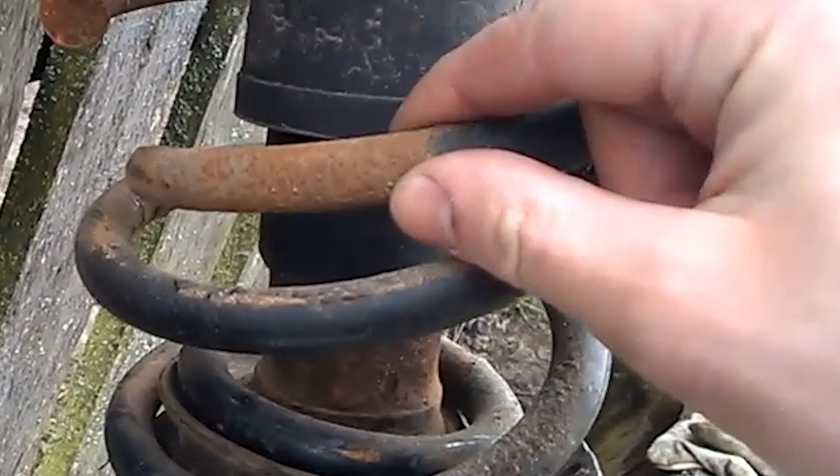Hey there! In this video, I'll tell you how to replace the front springs using my Audi A6 C5 as an example. I had a mishap where the front spring of the shock absorber strut in my car snapped. As you can see, the car's clearance has decreased, and if you look under the wheel arch, you can see that the spring is broken.

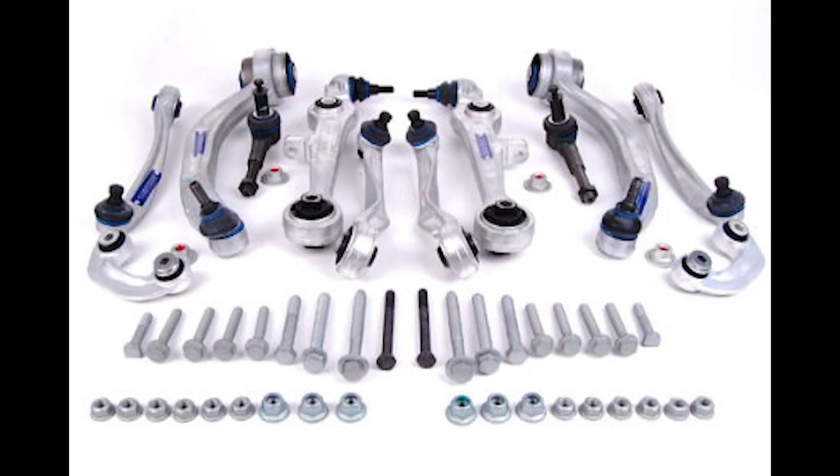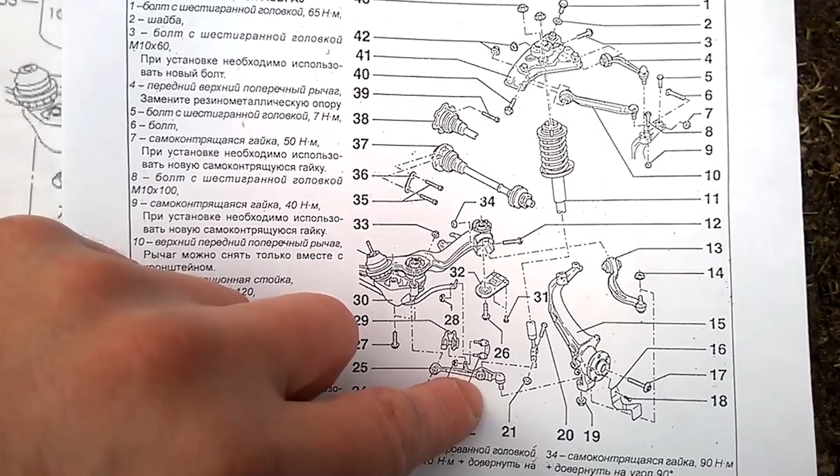By the way, in these cars, the front suspension is multi-link. According to the diagram, it's evident that we'll need to unscrew two upper control arms, remove the top bolt, unscrew the bracket under the hood, and from below, unscrew the bolt attaching the shock absorber to the lower control arm. Then, we can remove the strut to replace the spring. And now, let's do it.

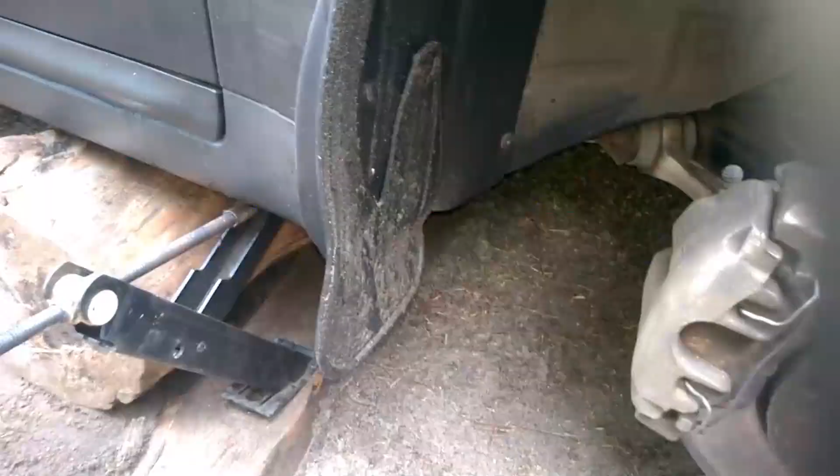We'll be changing the front springs on both the left and right sides. To do this, we remove the wheel, place the car on a secure jack stand, and start disassembling the suspension. So, after removing the wheel and jacking up the car, we can inspect the spring. As you can see, it's broken and its condition is terrible. Next, we need to remove the entire strut.

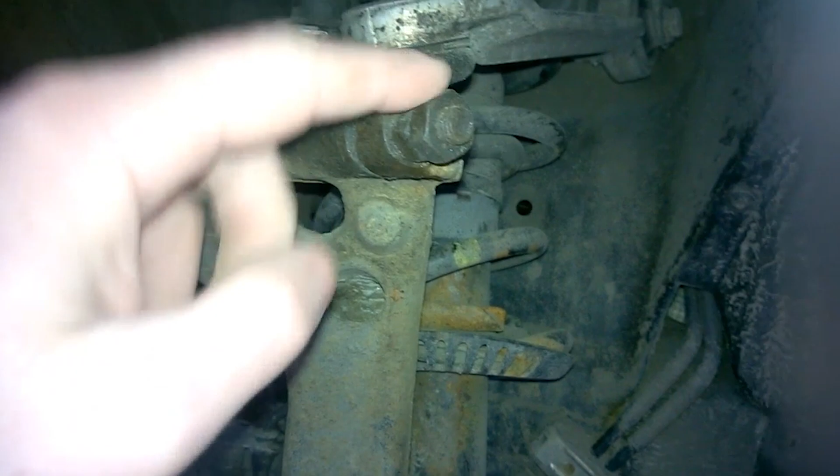To do this, we unscrew the bolt in the steering knuckle, which attaches the two upper control arms. Simply take it out and remove the arms. Then, unscrew one bolt here, attaching the shock absorber to the lower control arm. After that, under the hood, we'll need to unscrew 3 bolts to detach the upper bracket from the body, and then we can remove the entire strut.

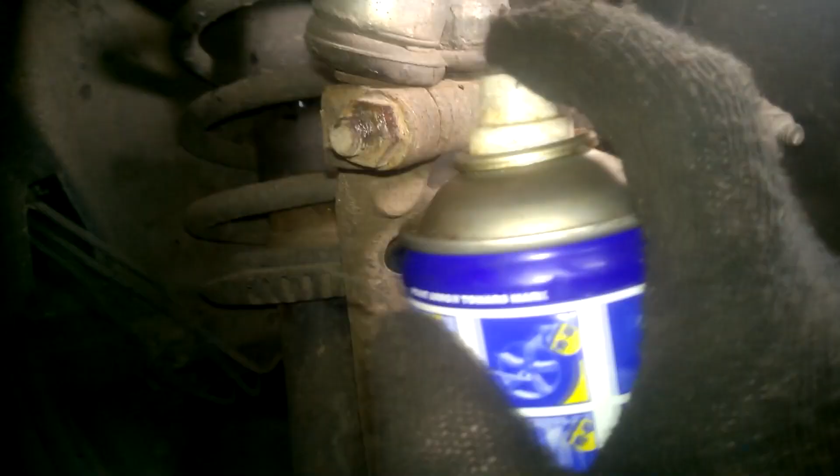The biggest problem is the long bolt, which tends to get stuck, and you won't be able to remove it without drilling. So, for loosening the steering knuckle bolt, my advice is to clean these slots where the control arms go. I've cleaned them, and I've generously applied WD-40 here. This is to ensure that the solution reaches the bolt and dissolves the rust. After cleaning everything, I started turning the bolt and continued applying a special solution. Then, with strong blows, we dislodge it.

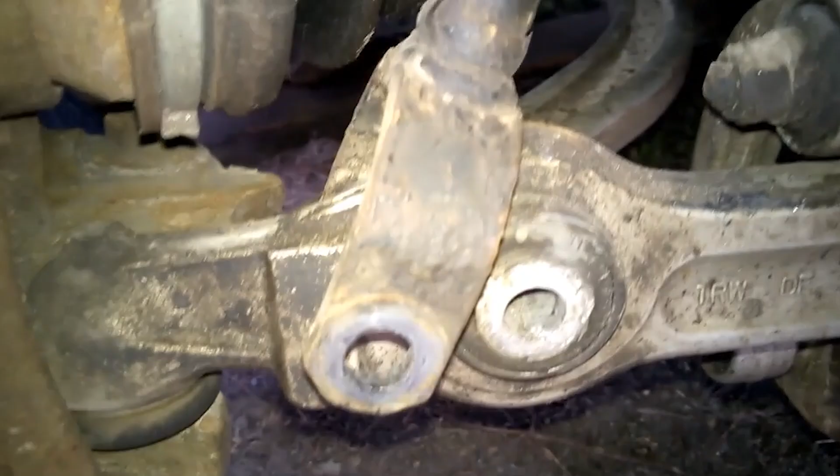Afterward, unscrew the lower shock absorber bolt. To be honest, it took a while to unscrew the lower shock absorber bolt because it gets clamped. So, it wouldn't hurt to loosen the stabilizer bar or somehow press down the lower control arm. While working from below, we rotated the strut and moved it closer to the CV joint to make it easier to reach the shock absorber with the spring. Just be careful not to damage the CV joint boot.

We've removed the long bolt from the top, and now we need to take out 2 levers. Suspension levers can rust and become difficult to remove, so to avoid hitting them directly, there are holes here through which you can use extensions to knock out the levers. I used a wrench from the toolkit. I tapped gently from below with a hammer, and everything comes out easily.

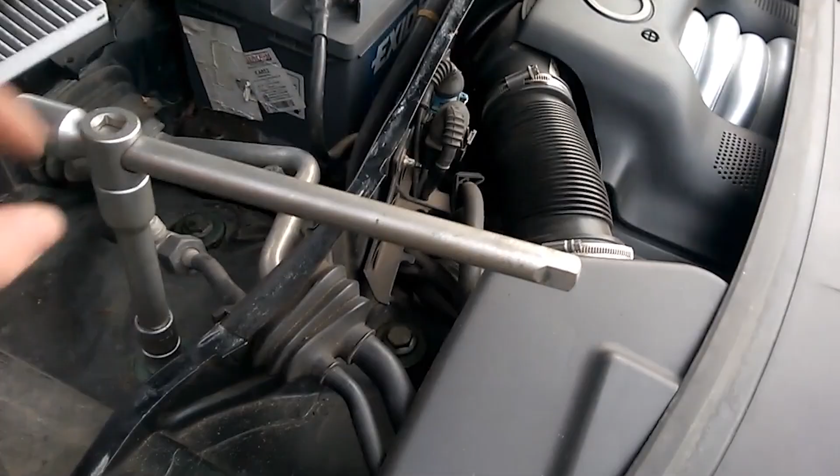After removing the upper levers, open the hood, where you need to remove the plastic shield and locate 3 bolts securing the bracket. Here's 1 bolt, here's the second, and here's the third. From the top under the hood, we've unscrewed the bolts of the strut. The suspension levers are disconnected, and everything is detached from below as well. Now, carefully take and pull the shock absorber strut outward, and then we'll proceed to disassemble it. So, we've removed the strut.

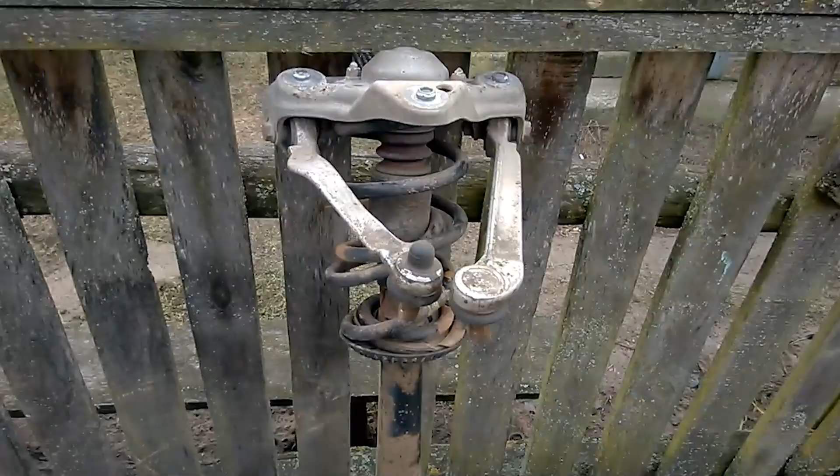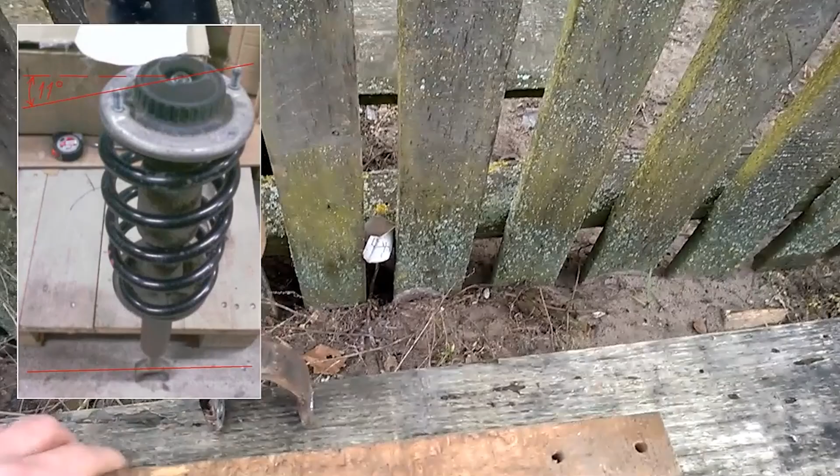Now, look at the condition of the spring. I didn't know how long I had been driving like this until I discovered the issue. I want to draw attention to the 11-degree angle. That's how the upper bracket is installed. If you look at the parallel strut, the upper bracket should be slightly offset at an 11-degree angle. In simpler terms, when disassembling the shock absorber according to the instructions, all these details are described.

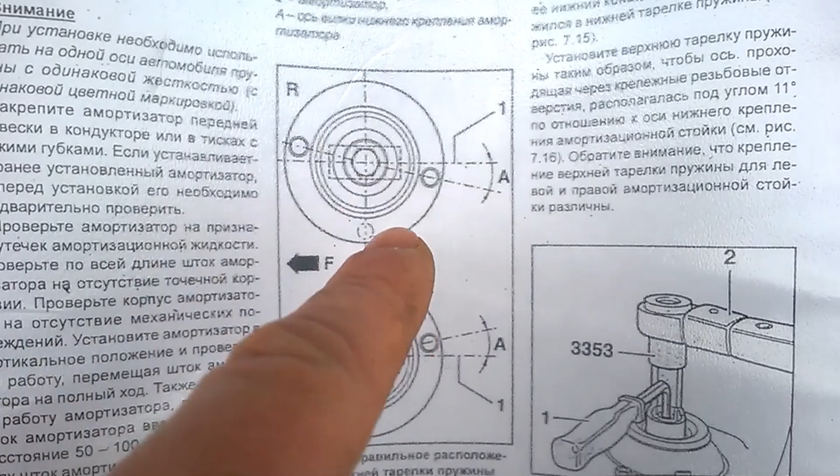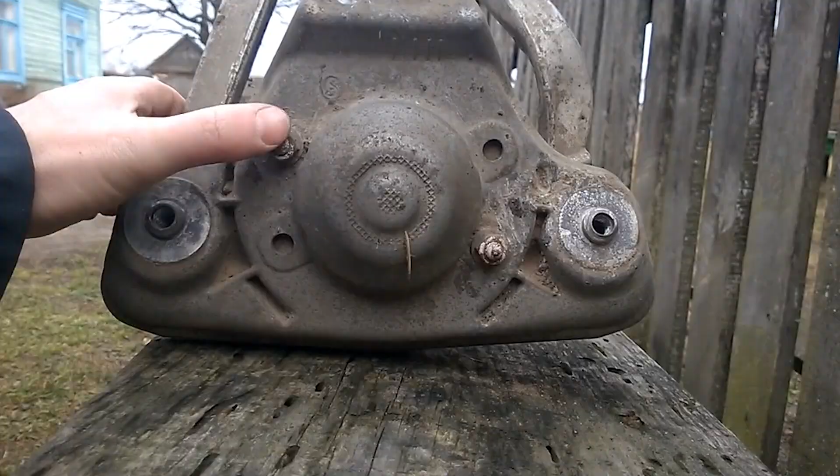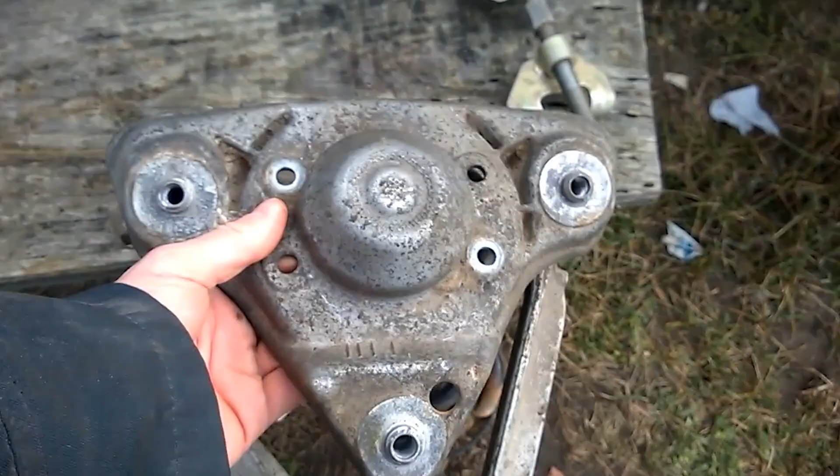Many people, when assembling the strut, don't bother with these angles and rotate the shock absorber fork when attaching it to the lower suspension arm. If you're disassembling the strut for the first time, it's better to mark everything and assemble it in the same sequence. Now, let's unscrew the 2 nuts and remove the bracket. If necessary, you can replace these suspension arms right away. Just keep in mind that when putting them back, the distance from the bracket to the arm should be 57 millimeters.

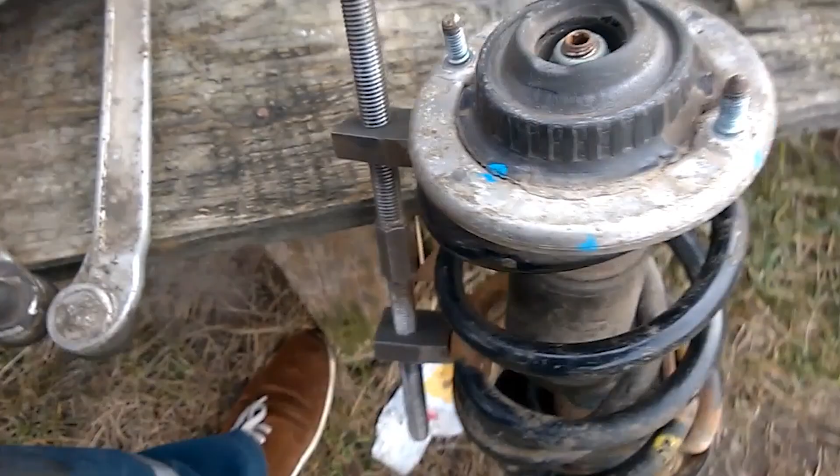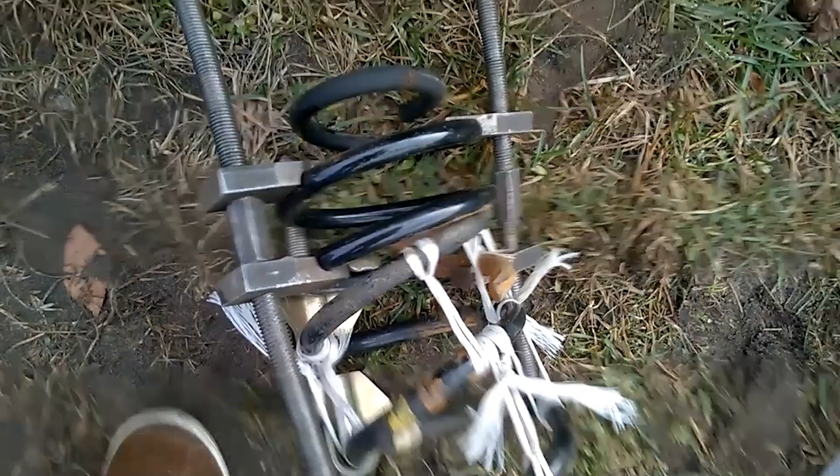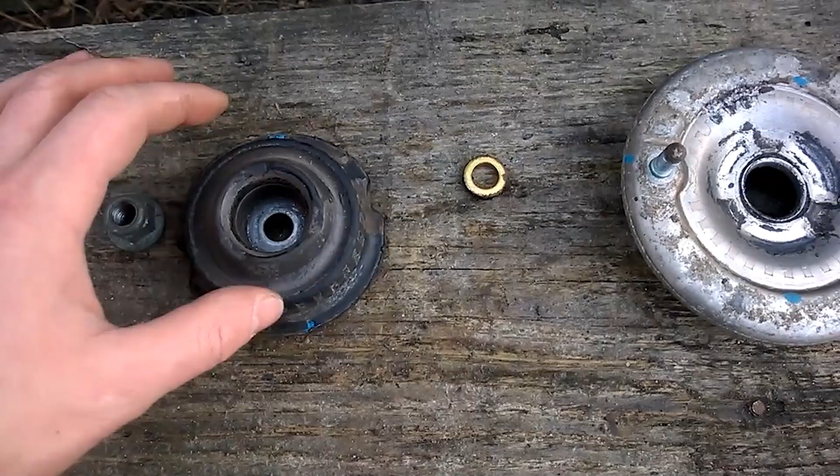Then, use clamps, compress the spring, and unscrew the nut here with an 18 millimeter socket, holding it with a hex key. Now, let's disassemble the shock absorber. I removed the spring. Honestly, it was challenging because it's broken. I secured the lower part of the spring with a string and the rest of the coils with special clamps. Then, I unscrewed the nut, removed the upper support, took out the washer, the plate, the bumper, the lower plate, and finally, the shock absorber itself.

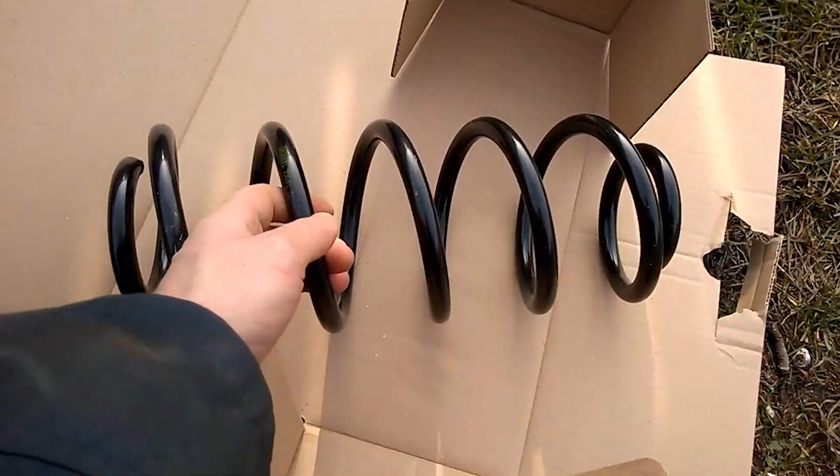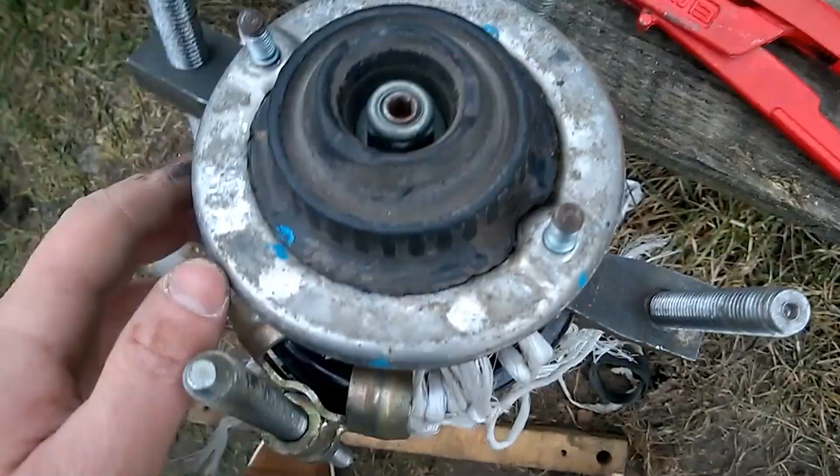After that, you can take the new spring. I decided to use this brand. This is how the new spring looks. Next, I compress it with clamps. In the end, I managed to compress the spring with 4 clamps, and for safety, I tied the coils with a string. Only after these maneuvers could I thread the upper nut onto the shock absorber. Next, I remove the clamps, put on the supporting bracket, and reinstall the shock absorber back on the car.

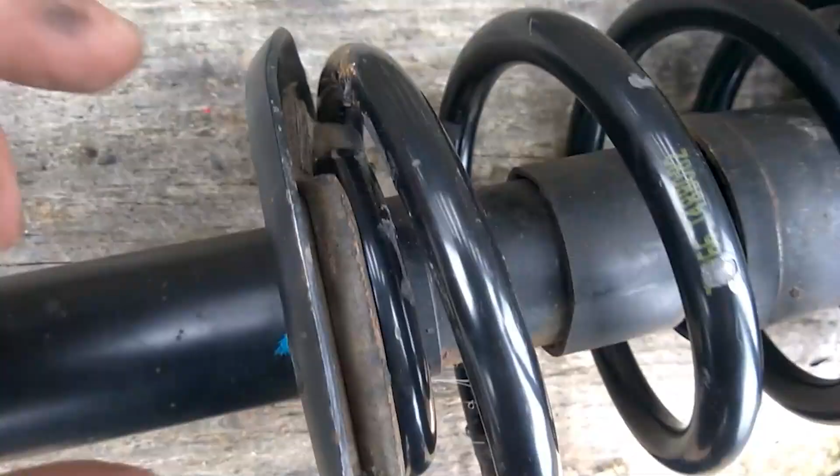This is how the strut looks with the replaced spring. By the way, pay attention to ensure that the spring coils are in the extreme positions of the upper and lower plates. I installed the strut back on the car, and as you can see, the car's clearance has increased, which is a reason to be happy. As you can understand, there's nothing complicated in replacing springs, and anyone can do it themselves.